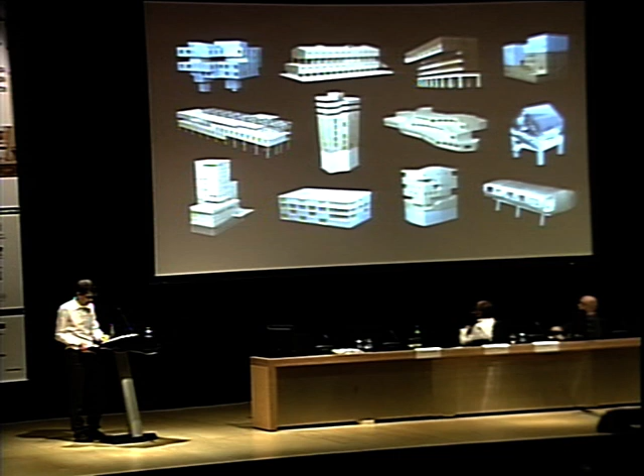One semester later, a lucky group of students came up with this vision, which is a virtual idea of this project, which somehow combined all the research we did before, brought it together, and put it into one very dense project.

Before I go into the architectural or the structural and constructive questions, I first have to talk about the building services, because as I mentioned before, it is not just about a nice architecture, it is about the interaction of technological questions and questions of architecture. So imagine being in complete loneliness, and how would you solve the very fundamental issues to run a small house or a building or a small hotel.

One of the main issues is about water supply, because when we think about energy saving, we first had to solve the water problem. Because in the old Monte Rosa hut, a lot of energy was spent to provide fresh water. That means during the year they melted snow to have fresh water. And this actually took most of the energy, which had to fly in by helicopter. So this is a very simple but very helpful idea that we created this huge reservoir, a rock cavern, that stores the amount of water we need to run the hut for 1 year.

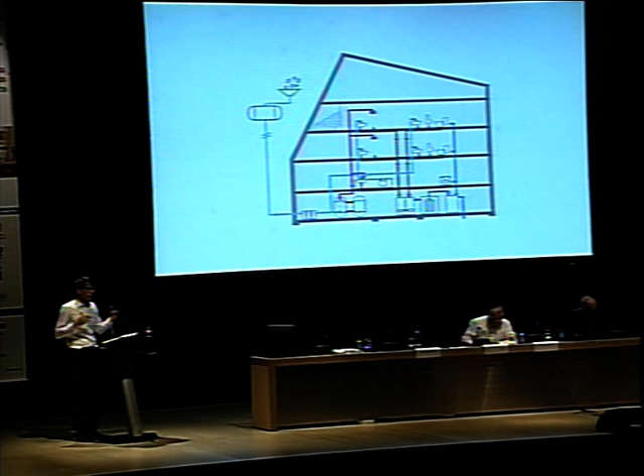Actually, water is a very, very valuable good on this site, and on the other hand, it allows us not to release any wastewater to the natural environment. So we only release clean water. This is quite common, you might say, but the challenge was to build up a stable system in this island situation with no backup system at all.

The electricity is created with the power of the sun. So we have a huge photovoltaic field on the building. And this is one of the most important pieces, which had the most impact on the architecture, because it's one of the biggest island photovoltaic systems we have in Switzerland. That means it has a certain surface, a certain angle we had to put it on, and it provides quite an amount of power we store in this big battery park here. This provides energy for kitchen, lighting, building services, and so on.

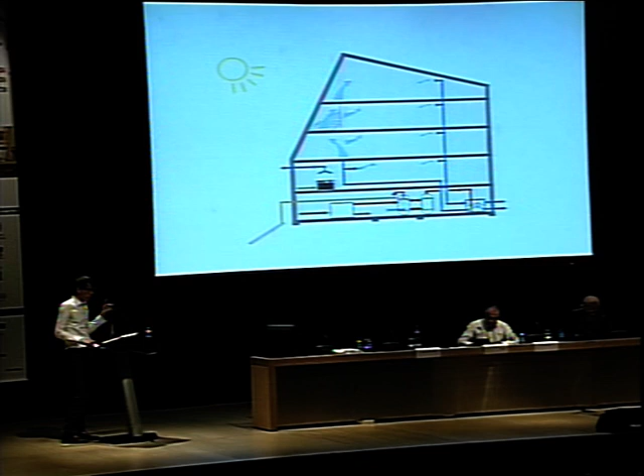And for rather extreme conditions, we have here a small cogeneration plant for backup supply of power and heat. Talking about heat, we also use the power of the sun. We have quite a huge thermal collector that provides heat that is put into this storage here and provides hot water for kitchen and so on, but also provides heat for the ventilation system, a ventilation system with heat recovery. And here again, the backup system for extreme situations without sun for a couple of days or a few weeks.

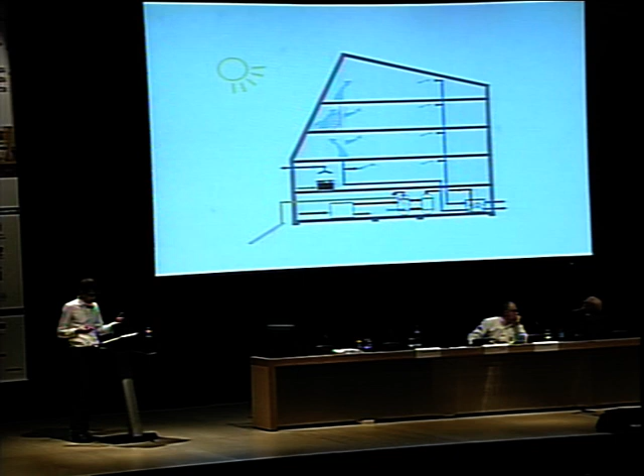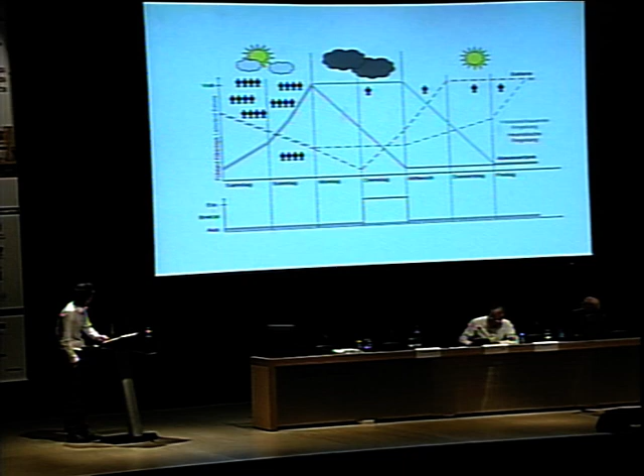And you deal with these rather unreliable natural resources. And the question is, how would you run this system to get it stable, so that we can avoid using the backup system, which would create some CO2 emissions. So this is the actual research going on in this very small but kind of ideal case study object. I'm not going into details, it would take quite an amount of time, but I would like to go back to the architectural consequences of this concept.

So, talking about the concept, the architectural concept, one way to explain it would be the relation between the building and its situation or the surrounding landscape. So our goal was to make us as small as possible, so that we do not spread out in this landscape, but rather get as compact as possible, to have the smallest footprint you can imagine.

And we ended up with this small but tower-like building that works like a milestone in the landscape, like a lighthouse. It kind of points out the virtual center of this tremendous landscape. So this is the point. This is actually the built project. This is the point where you go to, or from where you would go to the mountains. So it's the center of the landscape, even though there is no center.

Another approach to explain the concept is, I must say, a retrospective analysis in a way, but you would say what we try to do is to make a very tight or compact building. The idea is to have as much space as possible with as little surface as necessary, in order to save energy. So the ideal would be to build a sphere, but as you might know, to build a sphere is in fact rather difficult or challenging.

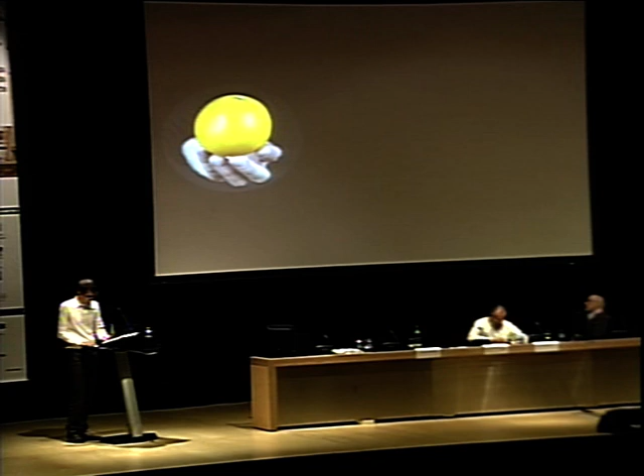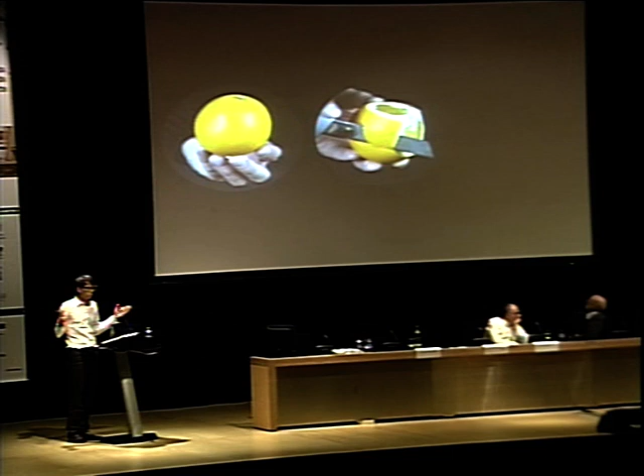So this ideal concept was kind of distorted; we had a certain amount of parameters, inner and outer parameters, that led to a certain distortion of this ideal form. For example, the photovoltaic I mentioned before, which is an important part of this whole concept and should be integrated into the building. So we had to cut the facade to integrate this huge surface at this very specific angle. Or rather simple things, to have a roof that gets rid of the snow loads and so on. So very simple but very precise operations that led to the final shape or geometry of the building.

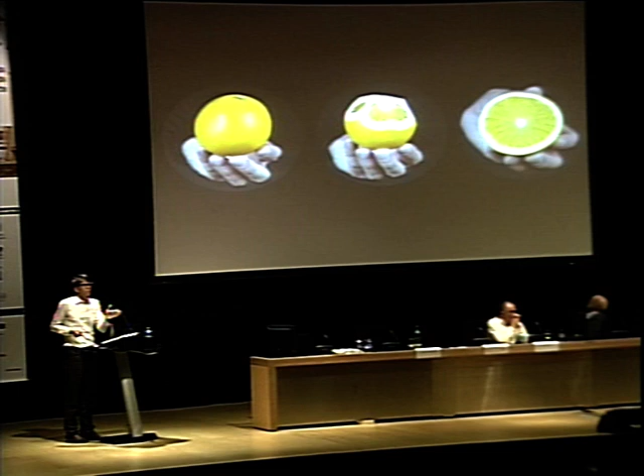And then another important idea is how you organize this building spatially or structurally. There we came up with the idea to organize it completely radially. That means we organize the floor plan into segments, 10 segments, each floor stacked up 5 times, and then we ended up with this kind of cellular system with 50 quite equal cells. And this system is our structural system, but it's also our spatial system. So this is the main concept of the spatial and structural organization of the building.

Another important concept is about the circulation, the vertical access to the building. In such a building, which is radially organized in segments, you might expect the vertical circulation in the very center of the building. But as our project is quite tight, too tight, we had no space in the center. So we shifted the circulation to the facade, which might be surprising, because usually the facade is necessary to provide light and air to the rooms. But we kind of turned it around, put the circulation to the facade and gave it light and air.

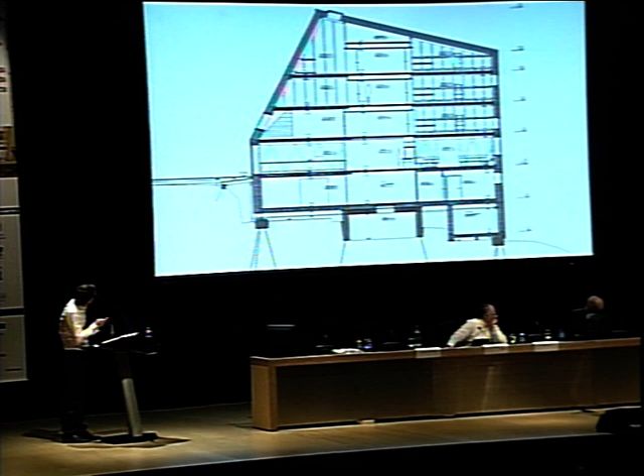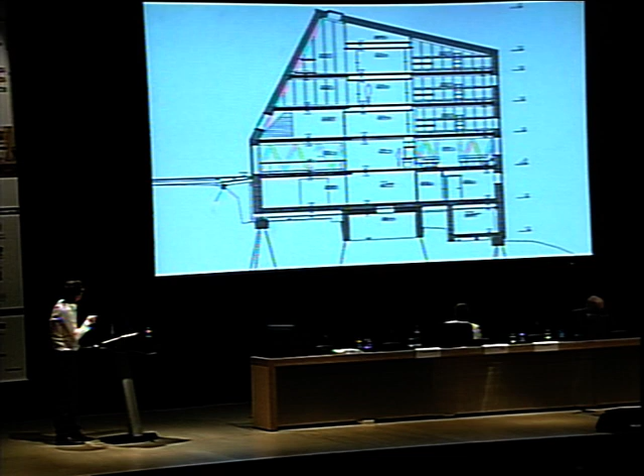So this actually is a section through this orange, but now it's becoming a building. And this orange, you see, the projection is not very nice, it's too wide. You have to imagine it a little more narrow. But this orange now sits on this foundation here. So here's the rock. We blasted one story step out of this rock, and then we established this foundation structure, a steel structure, and on top of this steel structure we put this pure 5-story timber construction.

And here you have a floor plan of the foundation situation underneath the building, where you see how we put the structure on the ground. We try to touch the ground as little as possible, in order to have outside air underneath the building, so it's ventilated around this timber construction.

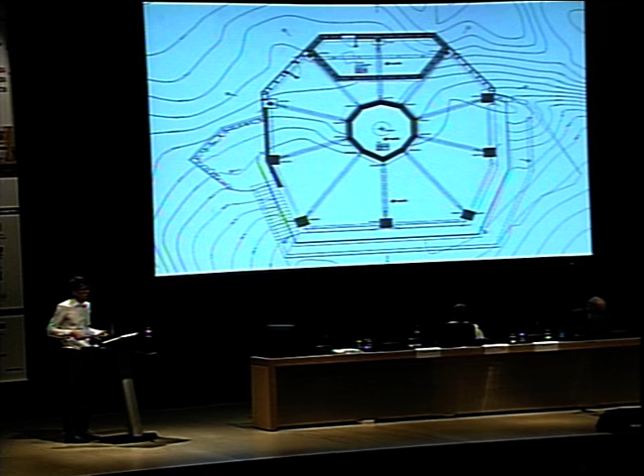You see the 10 axes, which are the main structural elements and also spatial elements, and the center foundation and the small foundations at the periphery. And here in this small room at the very bottom of the building, there's this wastewater plant.

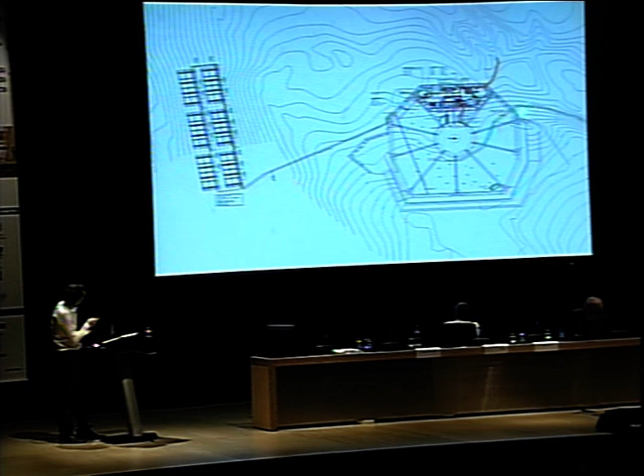Now, if we have a look at the building services at this level, here you would find, stuffed like in an airplane, very tight space, this small wastewater plant, and here you will find the thermal collectors, and here you find the freshwater pipes coming from the rock cavern.

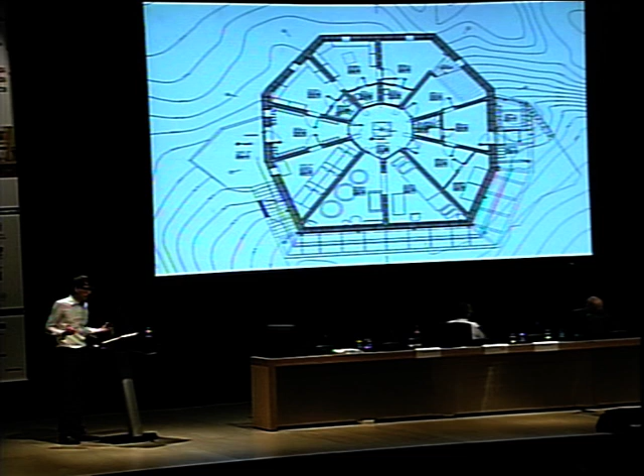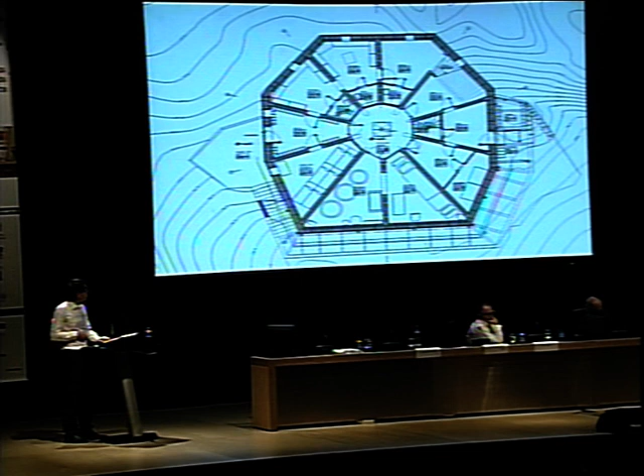Going now into the building, into the timber construction, into the warm shell of the building, we enter here. We get rid of the skis, we change shoes and come to the first landing of this first flight of stairs here. In this area there's quite some space for technical issues and storage space for the warden and his staff. Now we change to building services again.

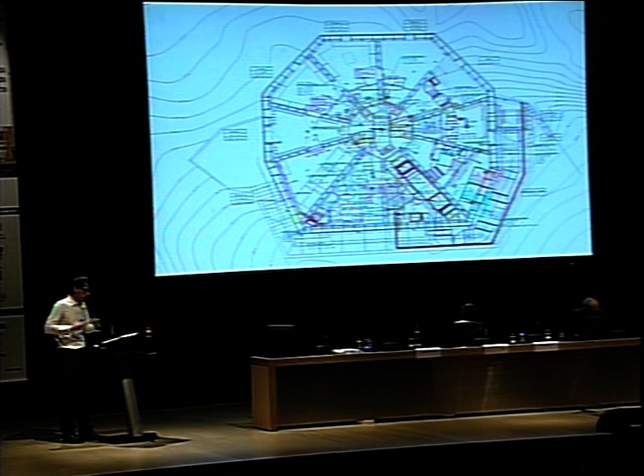What I explained before, those schematic drawings now become physical. They need some space and they need to be organized. And here you see all those elements like the storage, the heat storage, ventilation system, backup supply, battery, and so on. So you see it shifted away from this shelter towards quite a heavy instrumented building.

We go up, we come up this stair, and now we come to the ground floor, which is connected to the facade, to the terrace in the south, where you have access to the dining room, or here you have a second entrance situation.

You would enter here reception, and then come to the guest room, the kitchen in this area, and here we have a second vertical circulation, which is for the warden and his staff, which connects the kitchen and the storage below, as well as his small apartment in the first floor. So it's like a hidden second circulation system.

And here you can see the start of this ribbon window as I was talking about. So this window starts here at the kitchen, goes over, follows the dining room, and here it changes the room. Now it follows the circulation, the staircase.

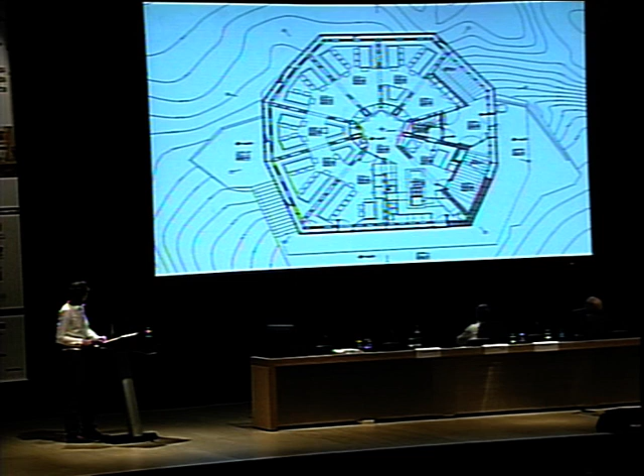Coming up to the first floor, another landing, and now the guest goes into the center of the building, and here you would get access to the first guest rooms, as well as to the bathroom and toilets. This seems to be rather normal, to have bathroom, toilets, and so on, but behind it you have to think there's quite some technological effort to provide these elements under these extreme conditions. And here's the small apartment for the warden.

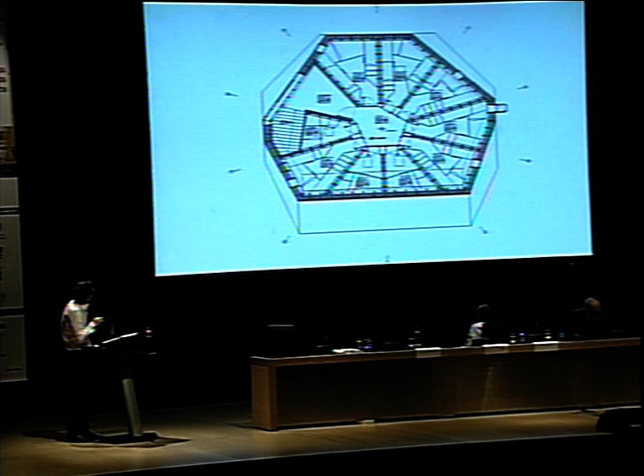And now we go up to the second floor, and what you realize is that the system always rotates two segments. We started here, ground floor, first floor, second floor, and now coming up to the last, third upper floor, which now is under influence of the south facade, which becomes spatially relevant. So it's not just a question of facade, but it also influences the geometry of the rooms in here.

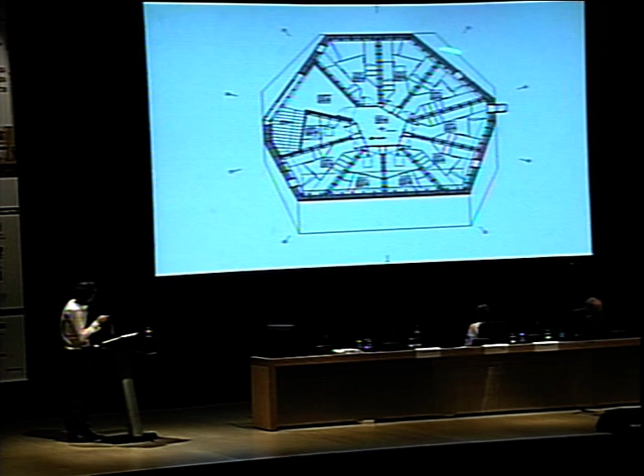Helicopter is something kind of unavoidable. Once you decide to build there, you have to deal with this issue, which means, first of all, it brings a lot of gray energy to your building, and second, it's an economic question. It's quite expensive to work with a helicopter. That means every kilo we had to bring there cost about 1 Swiss franc, which is almost like €1. So this really expands the cost rather extremely.

So this was a challenge for us to reduce weight wherever we could and to organize the logistics as efficiently as possible. And this was one of the very strong arguments also for the timber construction. Timber is not only a sustainable material as it grows, but it's also a very cost-efficient and time-saving construction in that you can prefabricate mostly everything, very precisely, and it is very strong structurally. So this is a very good material for us under these conditions.

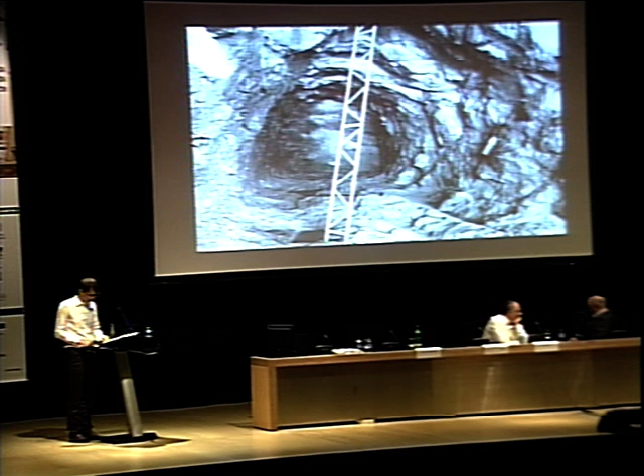Here you see the building site of the reservoir, which is a nice space, but it will be filled up with about 240 cubic meters of water. That is good enough for about 1 year.

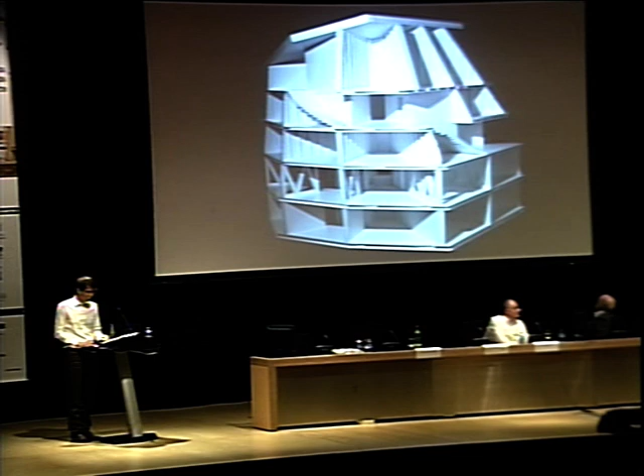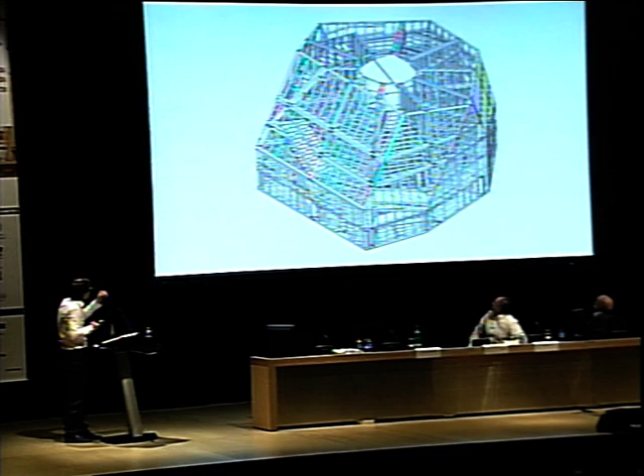This is like a plan of the beam construction. So we are missing all flat elements. I mean, there's no indication of the cross-laminated timber that covers up the whole structure. But here you see nicely the two geometries we had to deal with.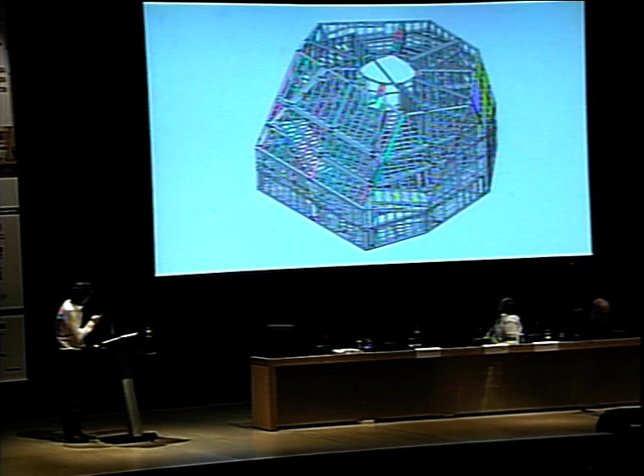First, the geometry of the facade, which follows a certain set of rules, and the geometry of the inner structure, which is perfectly symmetrically built up. And these two geometries somehow collide or come together in rather complex situations.

With today's technology, it's quite easy to build, meaning we have fully computer-controlled manufacturing, so that what we plan three-dimensionally on computer goes straight to the computer-controlled fabrication, and we can produce such corner situations quite easily, even introducing traditional wood-to-wood junctions, for example, here, so that you really can work nicely with the wood, even in a very traditional way, but efficiently and economically.

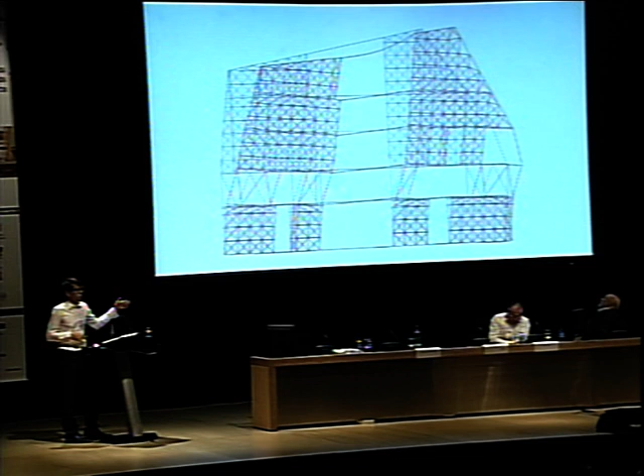This is the main structural concept, which means that all 5 stories and all those wall elements had to be put together to create one big shear wall that takes, first of all, vertical loads, but also the extreme horizontal loads, meaning wind up to 250 km per hour and earthquake.

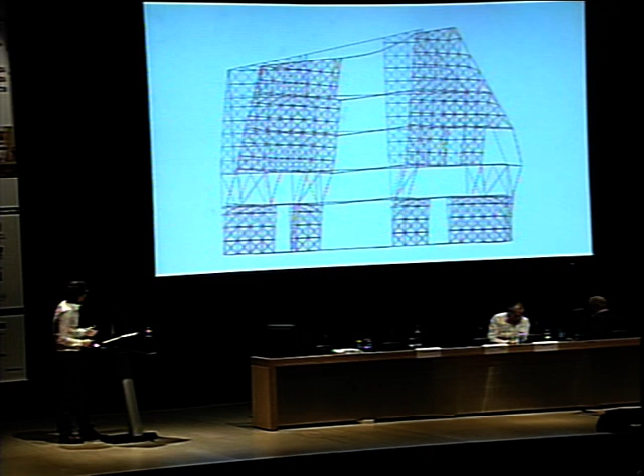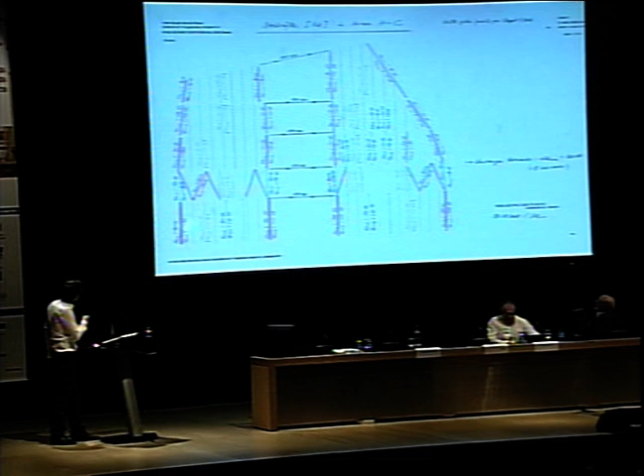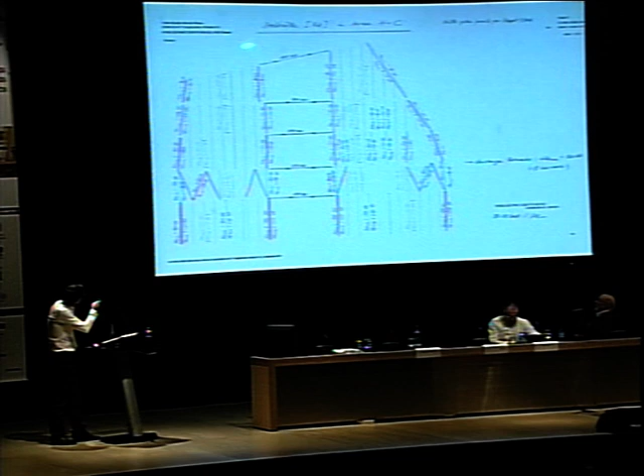Translated into forces, you have pressure and tension at the very extreme here of 400 kilonewton, which is like 40 tons pressure or tension, which is not a problem for a timber beam itself, but which is a problem in how you connect one wall to the other, each story to each story, to create this big shear wall.

Translated into construction, we created 3 different wall types. One of them is a typical framework boarded on both sides in the basement, just very thick and heavy walls here. Then we have an open structural timber in the ground floor, and then we have a kind of double wall system in the first to third floor.

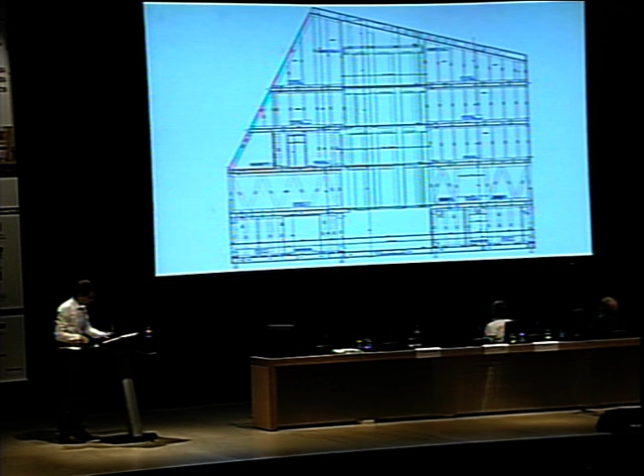This double wall system is structurally the same as here, but what we did, we cut a typical framework construction into 2 pieces and put it together back to back. So this looks like this. Here you have a section through this double wall system, which means you have this now visibly and spatially relevant. You see this framework situation, horizontal and vertical members of the framework,

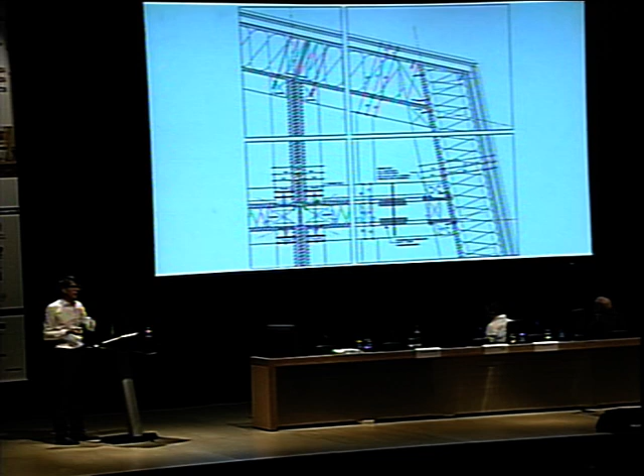then boarded on one side with a cross-laminated timber, and then another element put together back to back. And this was in order to reduce weight, so that each panel could be transported by a small helicopter first, and second, to give back to the architecture this rather constructive expression of timber, that we show all linear elements in the architecture.

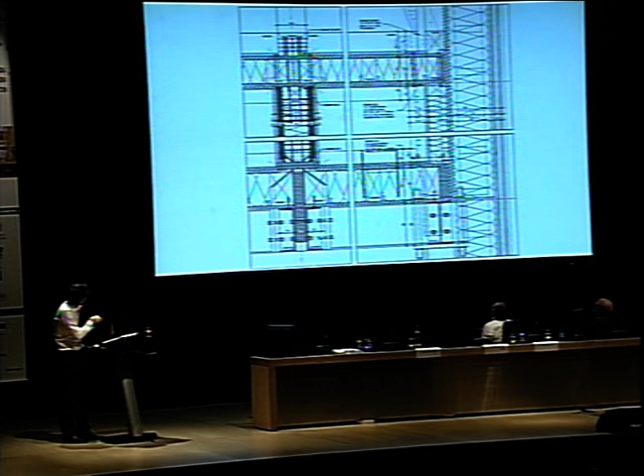And here you see the junctions, which are steel junctions from each story to the next, where we had to bind together this wall. Here you see second floor to first floor, and then the junction from first floor to ground floor, now changing to this single wall system, this structural timber system, then the junction down to the basement with this boarded framework here, and then the connection to the steel structure underneath.

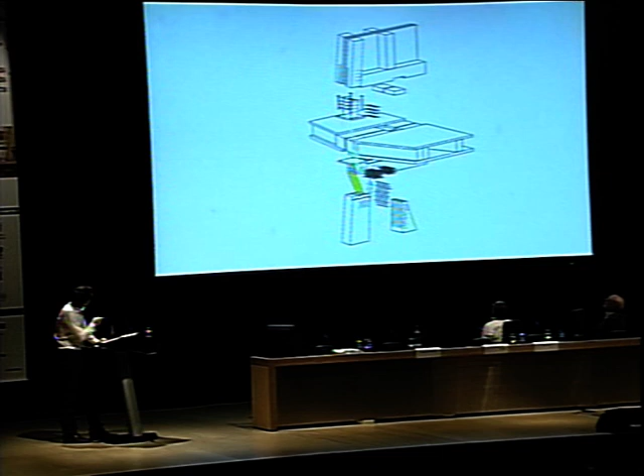3-dimensionally, it looks like this: the double wall system, the steel connection to the structural timber here, ground floor to basement, and the connection to the steel construction here.

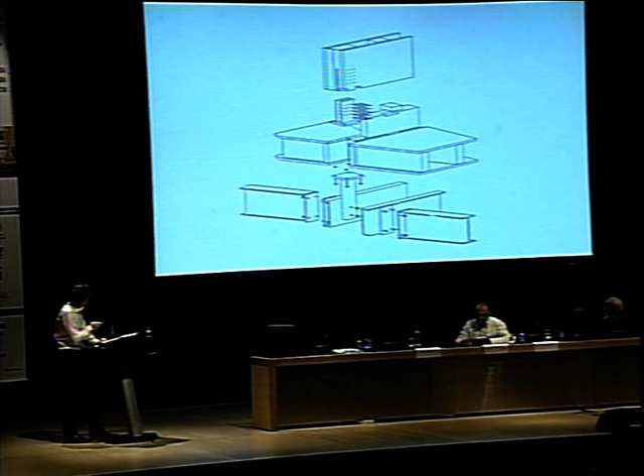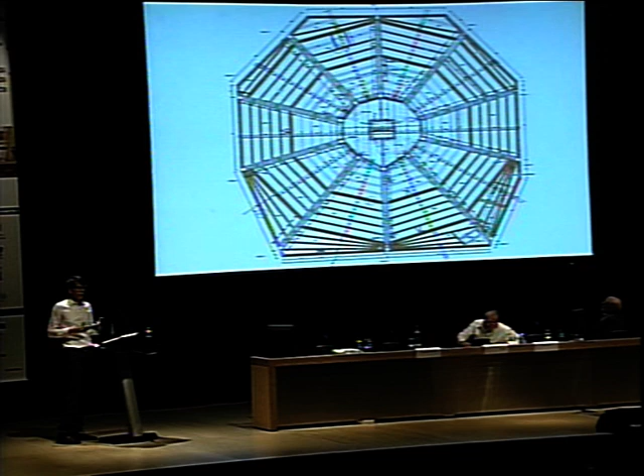This is the horizontal floor plan, where you can see how we had to divide up the elements, or each segment, into several pieces, so that in terms of dimensions and weight it was transportable at all.

The wood is all locally grown, fabricated, preconditioned, cut, drilled, and so on, computer controlled, all fully automatic, and then assembled, which is quite easy work, because all the elements are precisely cut, and you just have to put them together like a puzzle.

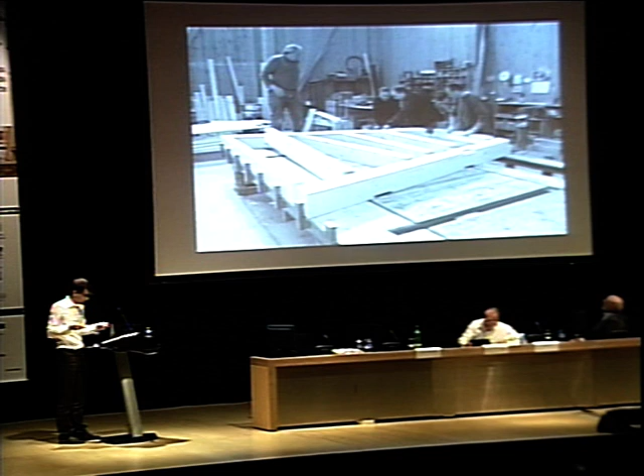Controlling the humidity conditions is important, as you have very low humidity in the high Alps. So the condition is important to control, and here you see a stack of those elements, around 420 elements, ready for transportation.

And here the building site in 2009 in spring, which means May, so several meters of snow still. We had to dig out the foundation and started with the erection of the building. So each piece was put on a truck, put on the train, another train, and then to the helicopter, and then straight to the building site, put right into place and fixed, and stacked up story by story.

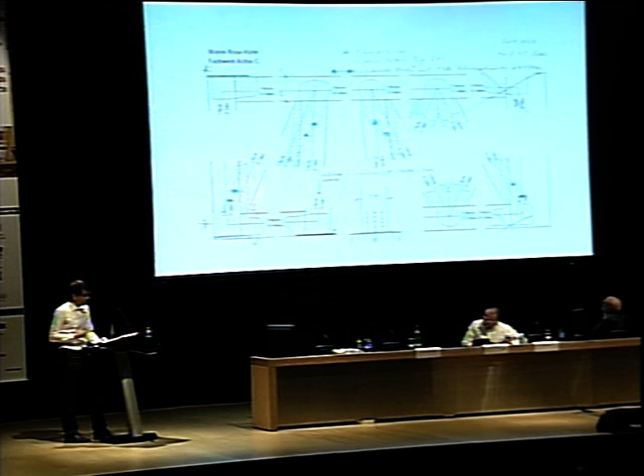Here you get an impression of the heavy structure, or the rather extreme forces you have in the building. These are some of the steel connections in the structural timber in the ground floor. You see here, it's not only timber, but timber and steel connectors. This is unavoidable if you have such extreme forces.

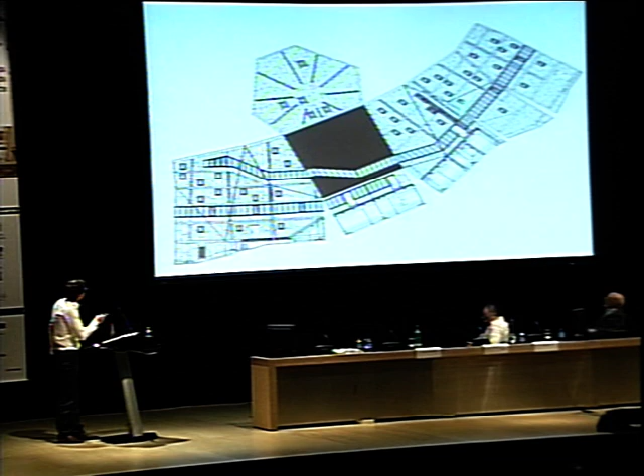So this comes together. And this is the building, the timber construction, which is a pure timber construction without insulation first. The idea was to erect this structure so that we really could control and seal every joint of this puzzle, and then cover it up with a thick coat of insulation and protect it with a very thin aluminum skin, the photovoltaic glass facade, and the ribbon window starting here, kitchen, dining room, following the staircase.

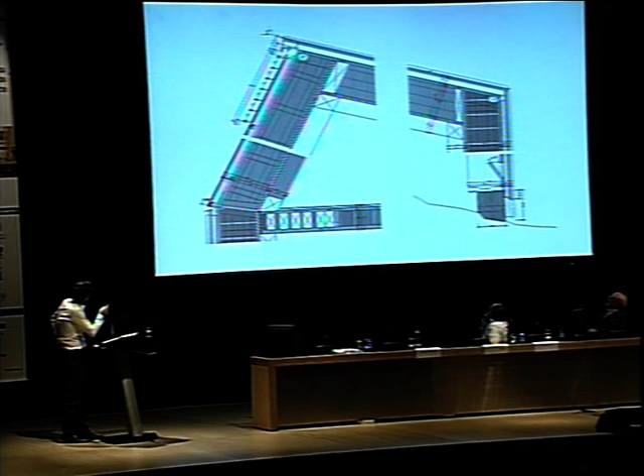And here again the construction, you see the timber construction underneath covered with 30 centimeters of insulation, ventilation, and then a very thin aluminum skin, or in this case photovoltaic facade. In horizontal section, you see the interplay between, for example, this small window, which sits perfectly in between those vertical beams, and in vertical section, how the small window fits to the bed.

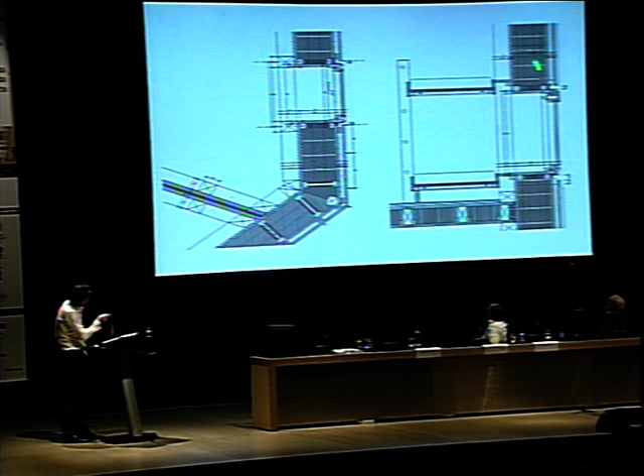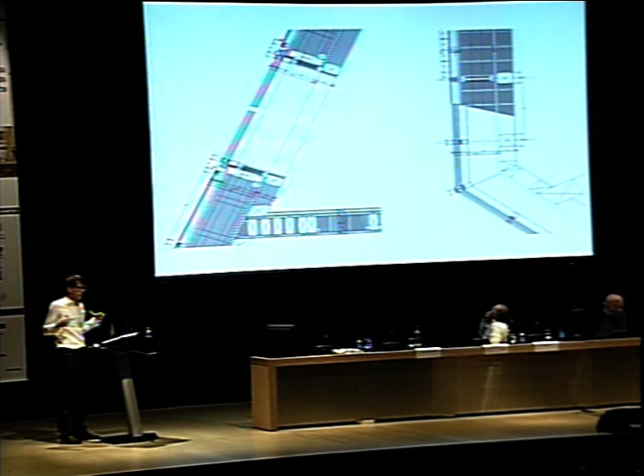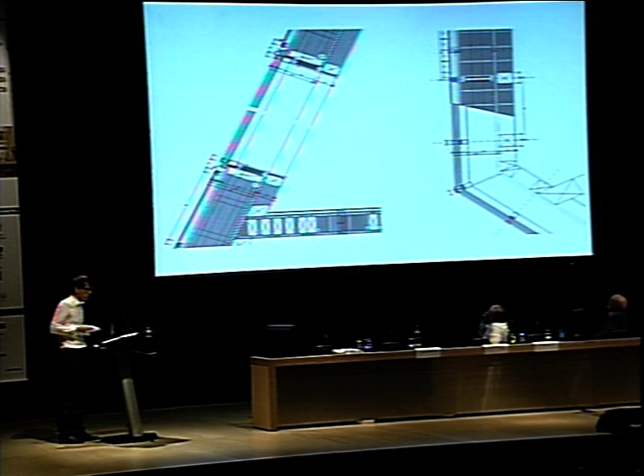And this is another interesting element, the ribbon window, which is a completely different construction. It's an aluminum post and beam construction, also prefabricated, and interesting for us because it goes around the body like a tattoo, like a snake, and somehow it had to fit on site. It was surprising how precisely you can work in metal construction but also in timber construction.

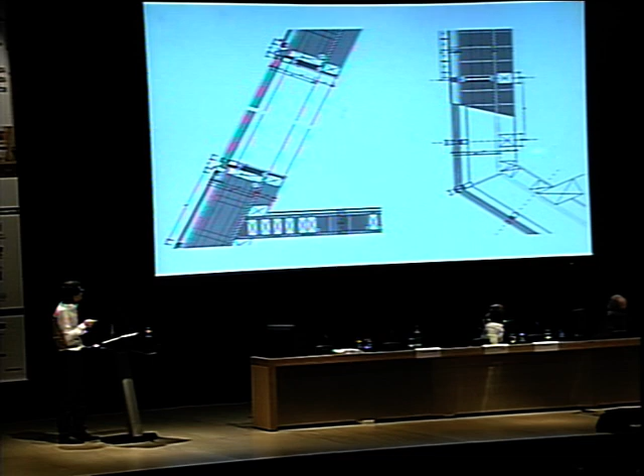And here in horizontal section you see the relation between today's 3-layer glazing and a thick insulation package of 30 and another 15 centimeters. So these are extremes in both ways. How we fit this ribbon window into the structure. This ribbon window had to pass specific fireproofing requirements.

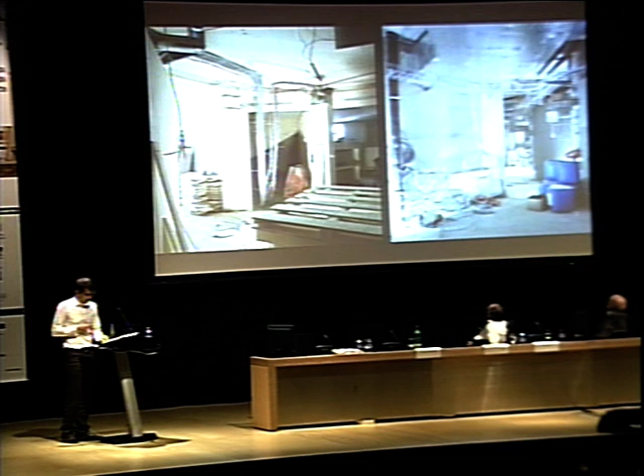And then in the interior, in the circulation space, in this staircase, we had to cover up the timber with plasterboard, as it is our main fire exit. Then once again, building services are not just a schematic drawing, it becomes physical, and it has to be organized: electricity, ventilation, heat storage. And here the main natural resources we have to deal with: heat and power, electricity.